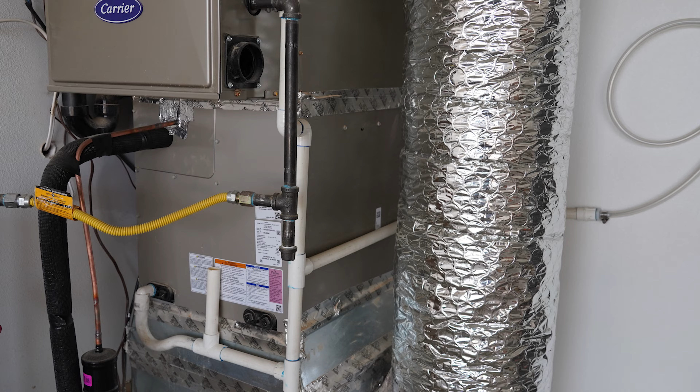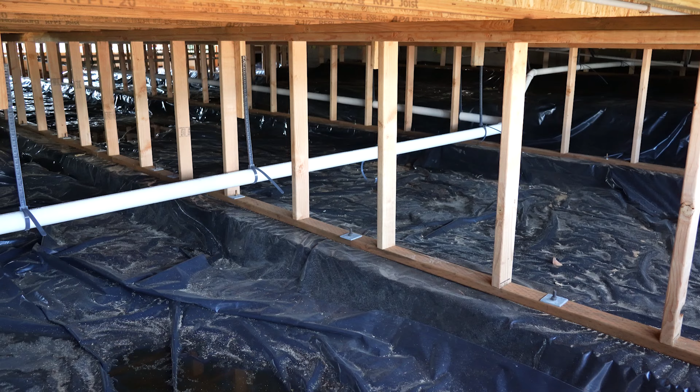The State of Oregon Building Codes Division, or BCD, provides a wide range of services to the public and to Oregon's construction industry. We serve Oregonians by working to ensure safe building construction while promoting a positive business climate within the state.

This is the Code Update Training for Chapters 12 through 24 of the 2023 Oregon Residential Specialty Code, also referred to as the 2023 ORSC. Chapters 12 through 24 represent the mechanical and fuel gas sections of the 2023 ORSC. This training video covers significant changes included in these chapters. This video is a continuation of the 2023 ORSC Update Training.

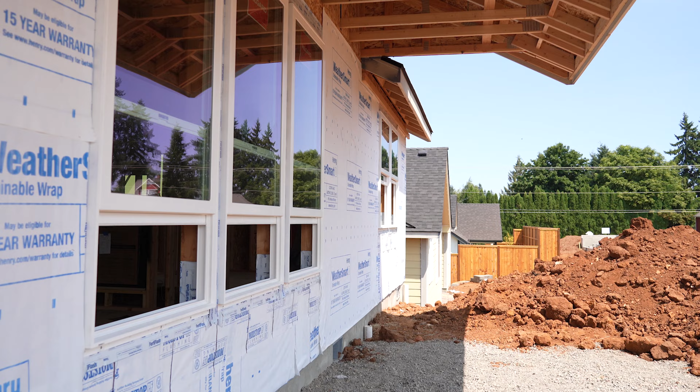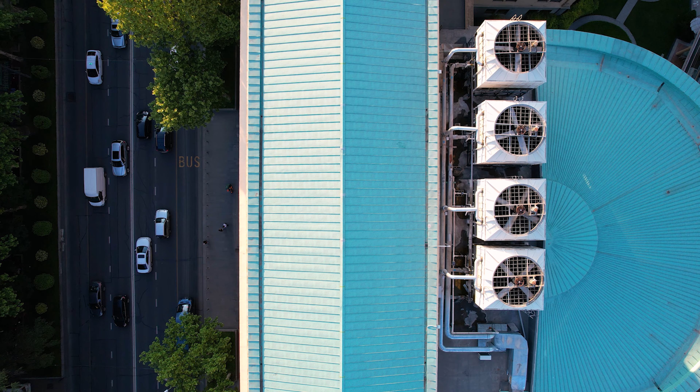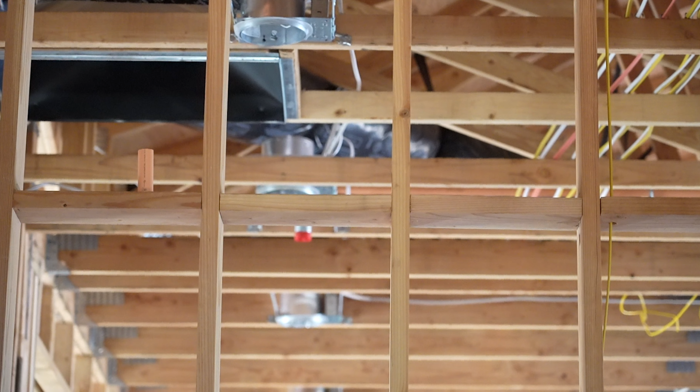Please note, this training pertains to residential mechanical and fuel gas provisions only. The associated commercial provisions can be found in the Oregon Mechanical Specialty Code, also referred to as the OMSC. Training associated with the 2022 OMSC, along with other informational resources and updates, are available on the Division's website at oregon.gov/BCD.

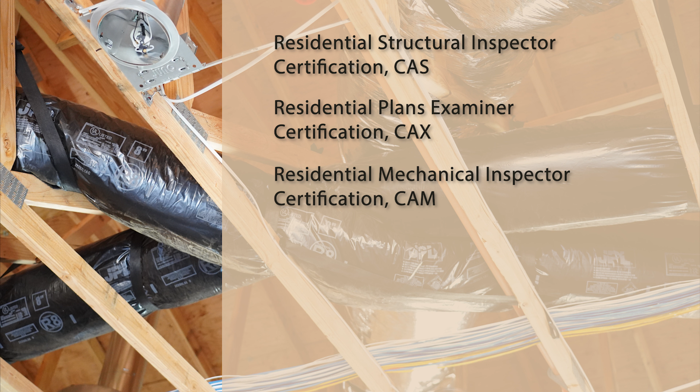All BCD Inspector and Plans Examiner certification holders are required to complete code-related update training, which is provided by the Division. The certifications that require this training are the Residential Structural Inspector Certification, also known as the CAS, the Residential Plans Examiner Certification, or CAX, the Residential Mechanical Inspector Certification, the CAM, the Specialized Finals Inspector Certification, or SFI, and the Specialized Solar Photovoltaic Certification, the SSI.

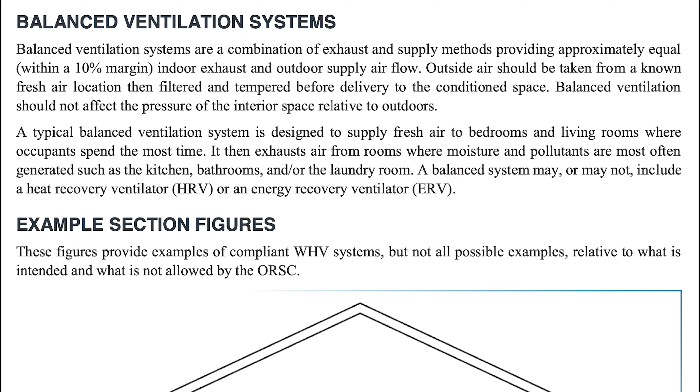The objective for this training is to identify the significant technical changes to the mechanical and fuel gas design requirements resulting from the adoption of the 2023 ORSC.

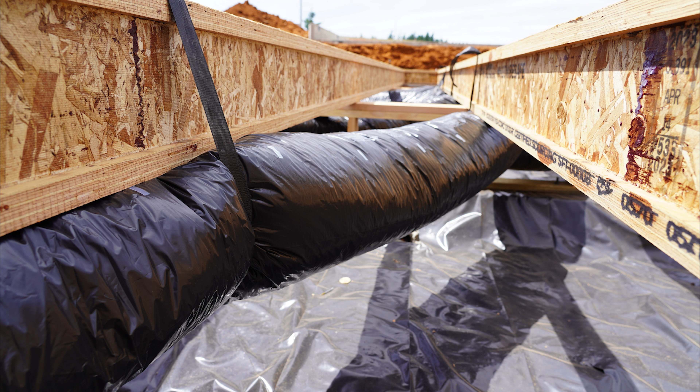Our presenters for energy efficiency, mechanical, and fuel gas topics are Mark Heiser, our Mechanical and Energy Program Chief, and Kelly Thomas, our Energy Policy Analyst. Mark and Kelly are both experts on Oregon's energy code provisions and upcoming changes to meet statewide energy conservation goals.

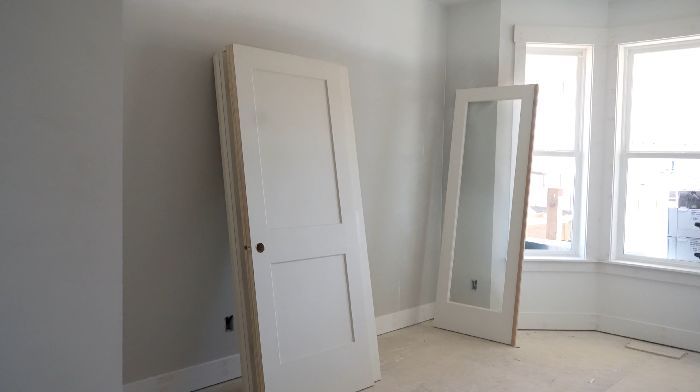The mechanical and fuel gas provisions of the 2023 ORSC are unique to Oregon. For this video, distinct formatting is being used to show the added and/or deleted changes. Blue underline denotes added language, and red strike-through denotes deleted language.

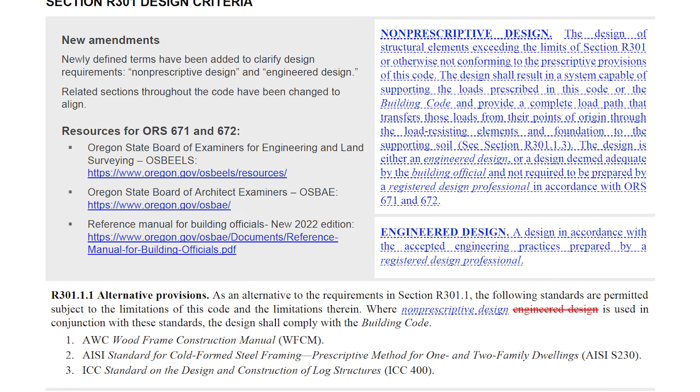For this training video, the Division has also created a supplementary code adoption summary that includes all Oregon amendments highlighted in this video and other important information about the new code. Please note that the formatting for code changes in the summary may be different due to the inclusion of both new and existing Oregon amendments.

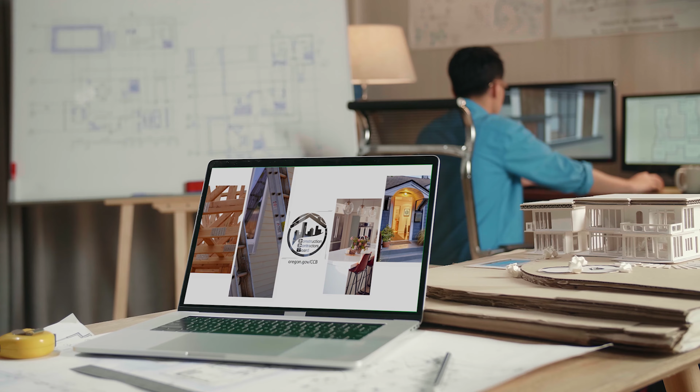I'm Mark Heiser, Mechanical and Energy Engineer for the division. I'll be covering revisions to the mechanical chapters 12 through 24. Let's begin with Chapter 13 and the anchorage of appliances. Prior to 2023, anchorage of water heaters has been located in multiple codes. Seismic anchorage has now been removed from Chapter 13 of the ORSC.

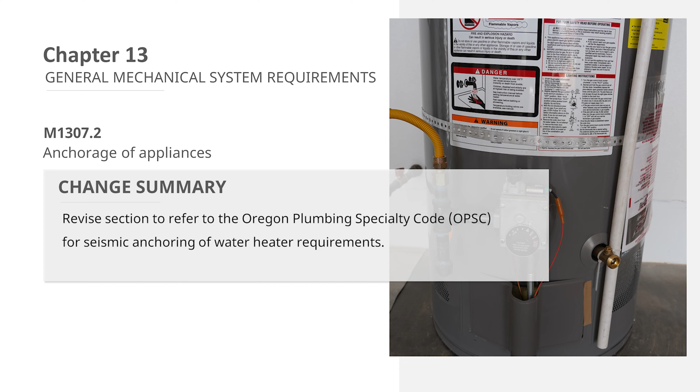Water heater installation requirements fall primarily to the plumbing code. For all future editions, the plumbing code will contain all seismic anchoring provisions for water heaters. So the water heater language is removed from section M1307.2. The remainder of section M1307.2 is relative to appliances designed to be installed in a fixed position.

A quick note about outdoor condensing units, which are equipment. M1307.2 is relative to indoor appliances like a gas furnace, while most condensing units are installed outdoors, at grade, and are not designed to be in a fixed position. See the product manufacturer's installation instructions for any special requirements, though.

When considering anchorage of outdoor equipment, see sections M1401.4 and M1308.3, which previously referenced section M1305.1.3.1. This reference section was for the installation of underfloor appliances. M1308.3 is now standalone and has language for anchorage, repeating the concepts for equipment located in a crawl space.

Section M1504.3 sets clearances between exhaust discharge locations and openings into the dwelling unit. A new exception from Model Code now allows reduced clearances when factory-built combination intake exhaust fittings are used.

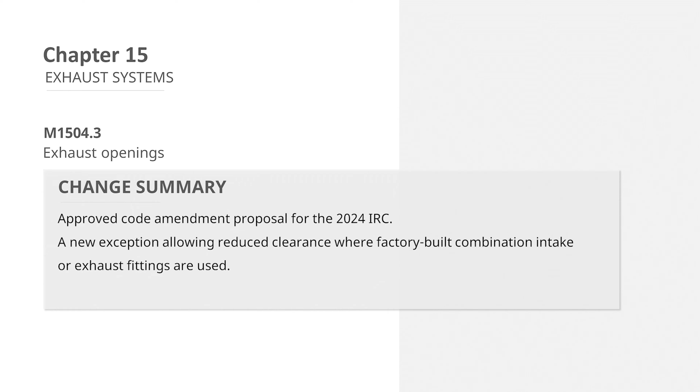Under Section M1504.3, an exhaust termination needs to be 3 feet from operable windows and door openings and gravity air intakes, or intakes that aren't mechanical or fan-powered. The separation distance to a mechanical intake is 10 feet horizontally, or the exhaust should terminate at least 3 feet above the mechanical intake opening.

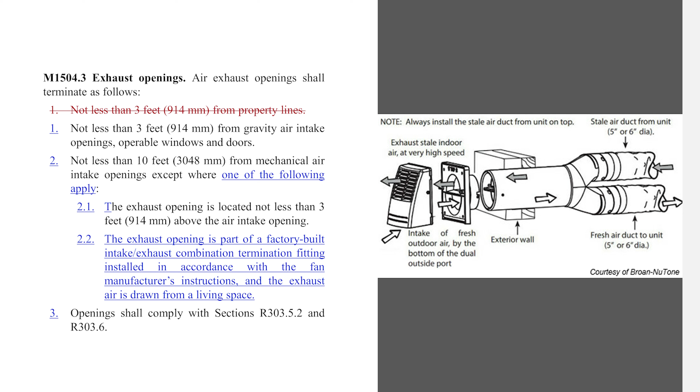The new code exception is for factory combination fittings and allows for mechanical exhaust to be adjacent to the mechanical intake. These fittings are normally part of a manufacturer's specific ventilation system, such as they come with an energy recovery ventilator.

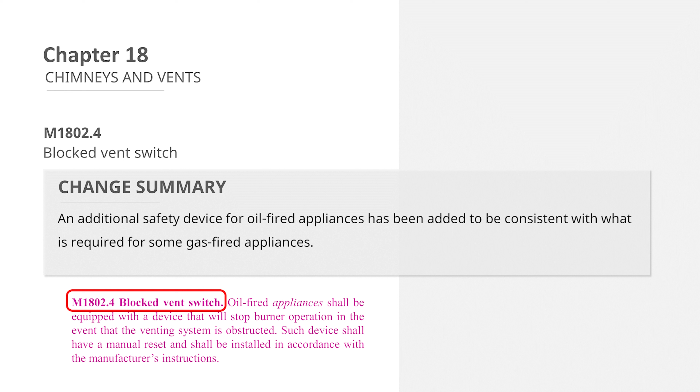Moving to Chapter 18, there is a new requirement for oil-fired equipment. New oil-fired appliances must have a blocked vent switch, providing similar safety operation to that found on fuel gas appliances. The new section, M1802.4, notes that the safety device will stop operation of the appliance if a blocked flue is sensed. A blocked flue can present a serious hazard, so this error requires a manual reset of the appliance.

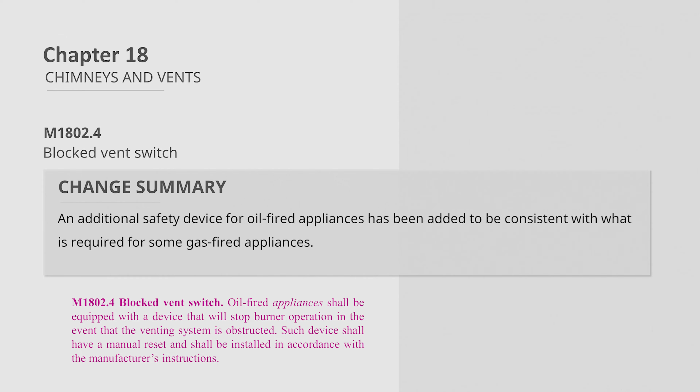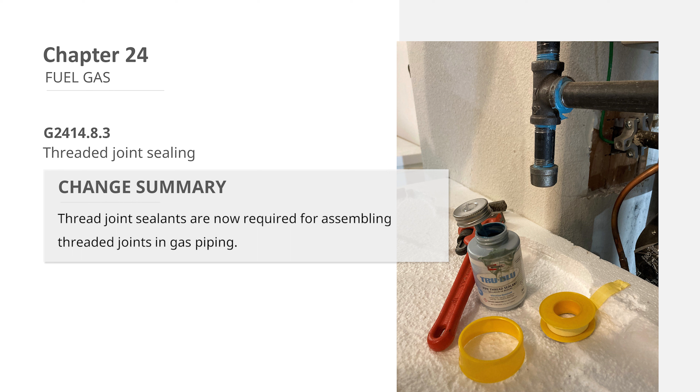Moving on to Chapter 24 Fuel Gas, which for 2024 has just a few minor revisions. The first change involves Section G2414.8.3, which covers the sealing of threaded joints, and this section has now been updated. It requires that threaded joints use a joint sealing material.

Section G2414.8.3 previously noted only minimum quality requirements for threaded joint sealant. Sealing of the threaded joints was not required. This section now requires that threaded joints be made using threaded joint sealing. And the sealant itself needs to be compatible with the pipe materials that the sealant is applied to.

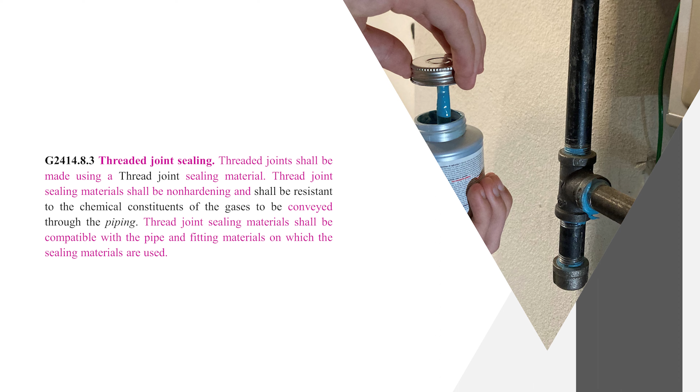A clarification has been added for gas pipe fittings installed in concealed locations. Without this new language, plugs and caps could be prohibited from being installed encased within a wall or other inaccessible cavity. The intention of this section is to not have fittings that might require service or a fitting more prone to leakage inside of a wall or other concealed location.

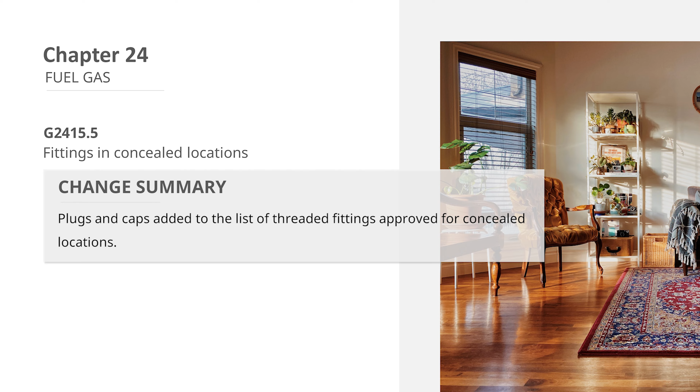As a general note, valves, unions, regulators, etc. are common fittings that need access and cannot be located in a concealed location. These fittings can be located in a crawl space or attic, but are considered concealed when enclosed within a wall. So as you can see, Section G2415.5 exception language now allows a plug or cap to be located in a concealed location. Plug and cap fittings are now considered equivalent to a threaded elbow, tee, or coupling.

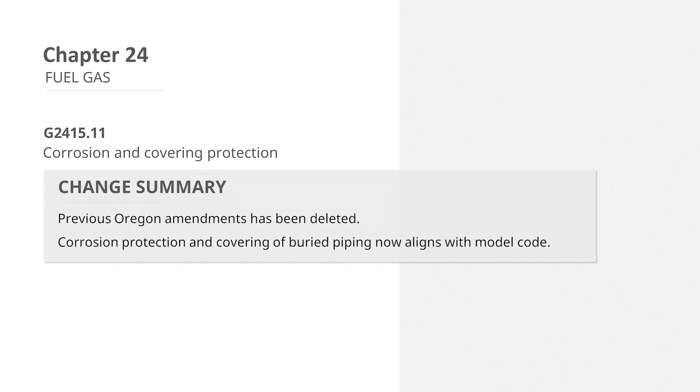The division continues its efforts to align with national model codes where appropriate. Included in these efforts is reducing the number and scope of outdated Oregon-specific amendments that are better suited to model code language. Section G2415.11, corrosion protection language, has been replaced with model code language for 2023.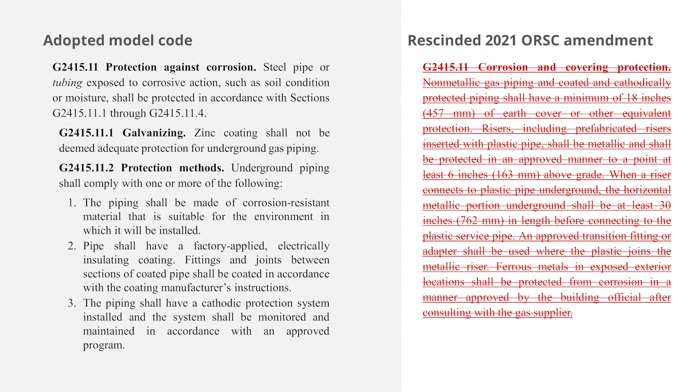In addition, there are fixes to conflicting burial depths for piping. 18 inches is the depth for the residential code. Under the OMSC, burial depth is 12 inches, as commercial applications usually have plans with better record of construction. The residential board, in consultation with the mechanical board, continues to require an 18-inch burial depth for most gas pipes installed under the residential code. There has been continued concern over homeowners hitting pipe, and this 18-inch depth aligns with the standard burial depth for the utility gas service to the dwelling meter.

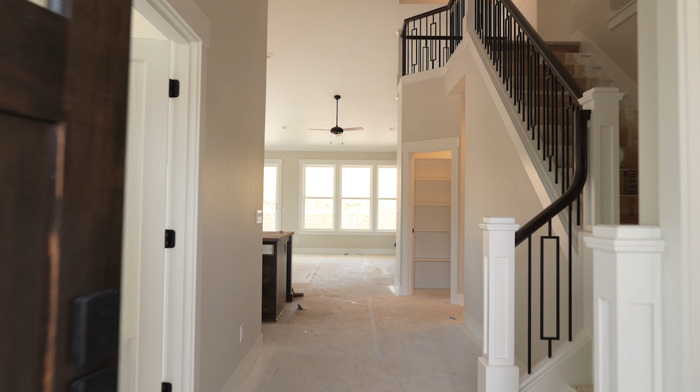Congratulations! This completes the 2023 ORSC Mechanical and Fuel Gas Code Update Training.